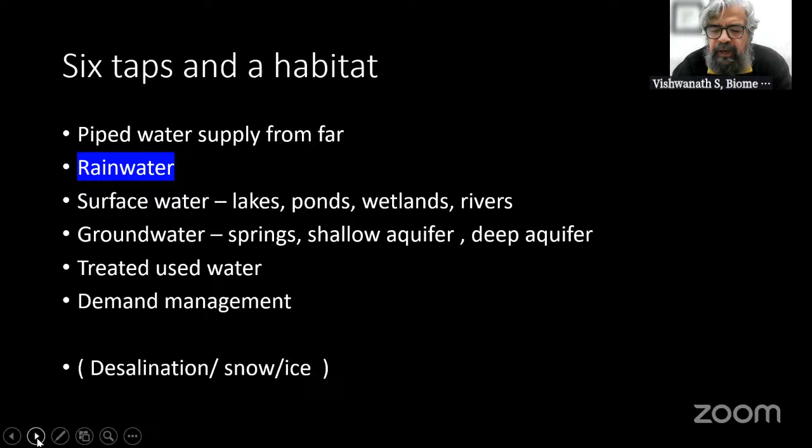So of the six taps that we have, some cities are lucky to have desalination, and some in the far north in the Himalayas may have snow and ice as one of the other taps. But broadly, these are the six taps available, and I'm only going to focus on the tap which is rainwater for this particular talk.

So what is rainwater harvesting? I want to go back to the basic definitions because there's always the need for clarity to understand what we are talking about. Simply put, rainwater harvesting is collection and storage of rain for future productive use. In the Indian context, rainwater harvesting has also been understood as recharge of the aquifer.

In other parts of the world, it's called managed aquifer recharge. But in India, rainwater harvesting is also understood as recharge of the aquifer itself. Fundamentally, of course, globally, like I repeat, it's collection and storage of rainwater. And so what are the components of this rainwater harvesting?

There's the catchment, which a designer has to deal with. There's the conveyance system. From the catchment, you have to convey the water. There's something called a first rain separator and a filtration system, where you filter the water for the quality that you need to store it longer. Then there's the storage itself.

You can have storages as rain barrels, as pumpkin tanks. You can have underground sump tanks. You can have overhead tanks, and there are many forms of storage. And finally, there is recharge, and there are many ways of designing recharge structures. I'll explain some of the recharge structures I have worked with.

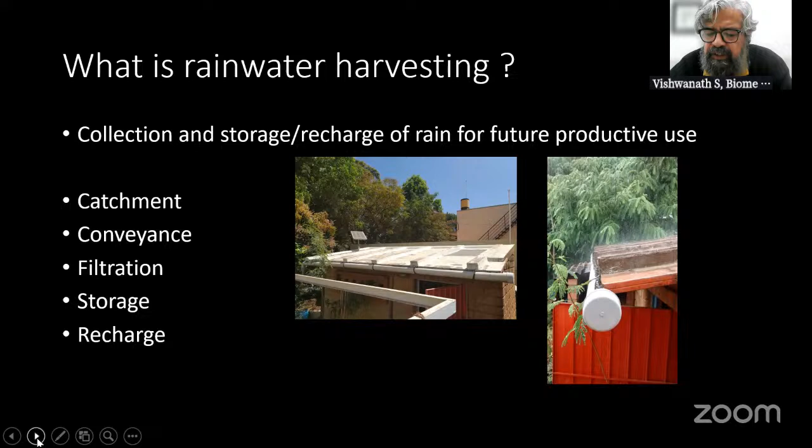So at a broad level in an Indian context, this is how a rainwater harvesting system looks. There's the rainwater coming in from the pipe, first rain separator. The blue drum is a filter in this particular case. And after the filtration, the water is stored in a sump tank. And because the underground sump tank is of limited capacity, it may sometimes overflow.

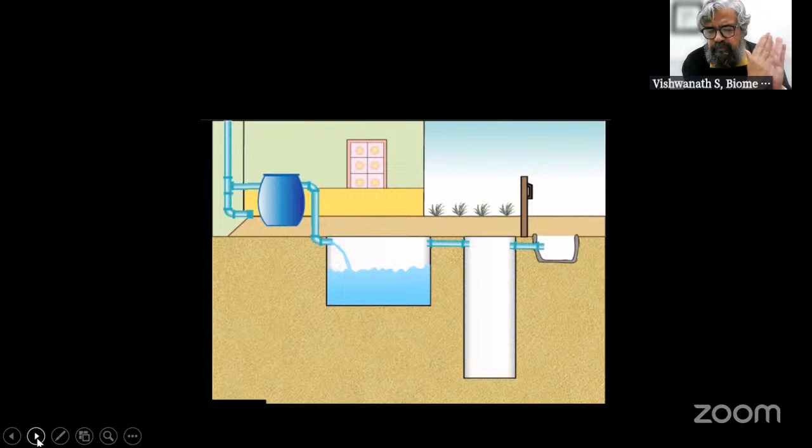And that overflow goes to what's called a recharge well. And that recharges the aquifer from which you can tap it. So all components are here. There's the first rain separator, there's filtration, storage, and recharge.

Why rainwater harvesting? Well, it's broadly at a city level to supplement water requirements. It's not a complete replacement because we don't have that kind of rainfall in many places or the capability of investing in large-scale storage. So in the majority of cases, it's a supplement to the water requirement of a household or a school or an institution or whatever is the consumer of water.

Then you harvest rainwater to recharge aquifers. Many of our cities and towns, especially in the Indian subcontinent, also Sri Lanka, also Bangladesh, also Pakistan, have a large dependence on aquifers, groundwater for requirements, and rainwater harvesting can supplement the recharge of these aquifers.

One other interesting aspect that's coming into urban areas is to minimize flooding, because flooding is now becoming an urban phenomenon thanks to climate change and global warming. But by harvesting rainwater at individual plot level, you can sort of minimize the impact of this runoff on the city pavements.

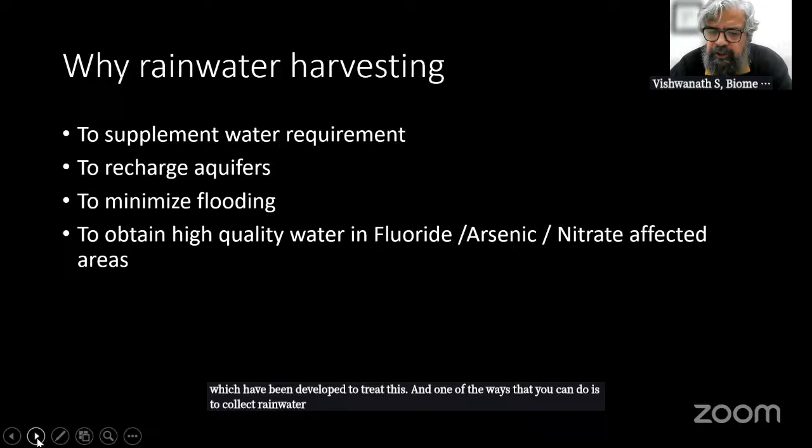And in particularly bad quality areas, like areas which are affected with fluoride, arsenic, and nitrates, stored rainwater can be free from fluoride, arsenic, and nitrate, and after basic treatment can be consumed for drinking purposes. Mr. Watson Chandrasekhar, who's also part of this conference, has many filters which have been developed to treat this. And one of the ways is to collect rainwater and filter it, make sure that it's potable, and use it to replace fluoride contaminated, arsenic contaminated, and nitrate contaminated waters.

So what does rainwater harvesting depend on? Well, obviously it depends on the total annual rainfall, but not only the total annual rainfall, but the rainfall pattern. In my city of Bangalore, rainfall is distributed over 8 months. We have 60 rainy days, but it's well distributed over 8 months. If you have a well-distributed rainfall pattern, then it becomes easier to store water. You don't have to build large storage tanks.

But suppose you're in Rajasthan or Gujarat, or states which are dry, where rainfall may occur over a single day in a year, or maybe 3 to 5 days in a year, then obviously you need to build a large storage tank, because you have to store this water for productive use.

One other interesting factor is rainfall intensity. As rainfall intensity is increasing, we need to design our conveyance system, the rainwater gutters and the downpipes, to combat this rainfall intensity, but also our filters. Our filters need to handle large volumes of rainfall. So rainwater harvesting depends on rainfall pattern, rainfall intensity, and rainfall distribution.

The catchment area is most crucial to rainwater harvesting. The catchment area needs to be clean, and both the quantity and the quality of runoff have to be assured, so that the harvested rainwater is fit for the use we desire from it. Then the biggest challenge with rainwater harvesting, as most rainwater harvesters will know, is the storage system. The storage is the costliest part.

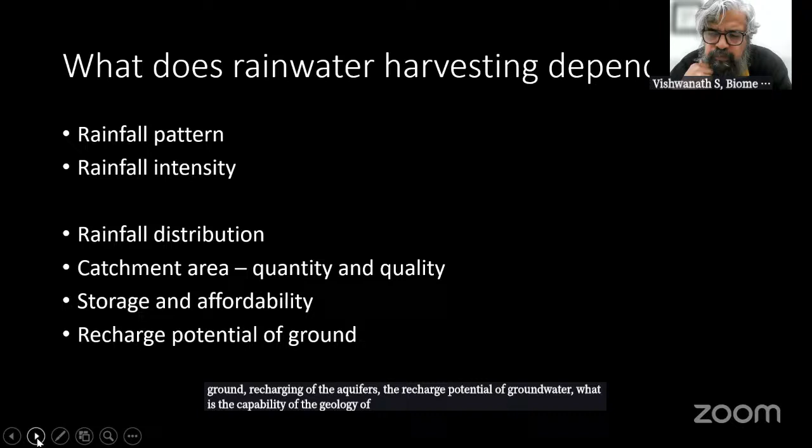There are efforts made to reduce the storage cost by building ferrocement tanks and many other forms of storage, but the cost of storage determines how much we can afford to harvest rainwater. And when it comes to recharging of the ground, recharging of the aquifers, the recharge potential of groundwater, the capability of the geology of the soil to take and absorb water and hold on to it will determine how rainwater harvesting can be done.

In my city, for us, it's of great interest that if you have a small plot of land, in a semi-arid context where there's 970 millimeters of rainfall, and if you have not built on this small plot of land, then when there's an average annual rainfall, the surface runoff is usually 15%. About 10% recharges, that is, it goes into the ground below 1 meter, but up to 75% of it stays in the soil profile of 1 meter and goes into the air through evaporation or evapotranspiration.

But the moment that small plot of land is built upon, the surface runoff now increases to 90%. The recharge reduces to 5% because we almost paved the entire area, and evapotranspiration drops from 75 to 5%. So the aim of rainwater harvesting is biomimicry. Can we design our system to hold on to the water, which is now in excess of the normal runoff from that plot of land, right?

So therefore, you leave a certain portion of it to get to the watershed to become a common asset. But 15 to 90, it's the responsibility of the institution or the building to make sure that 75% of the rainfall is either stored or recharged into the aquifer, so that it does not cause negative damage to the environment. That's one of the ideas.

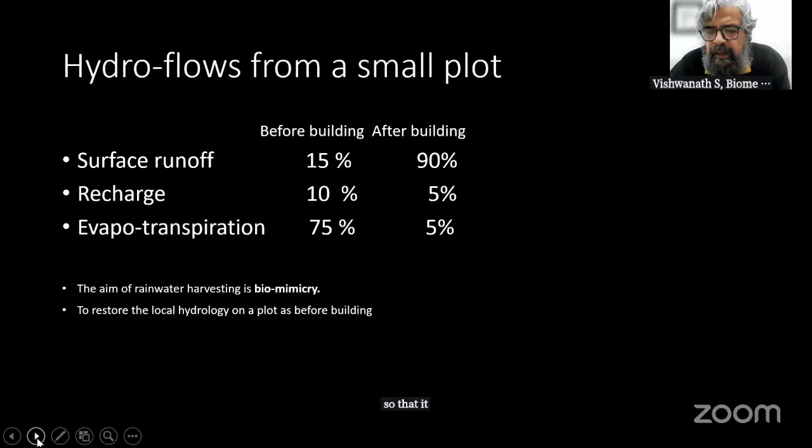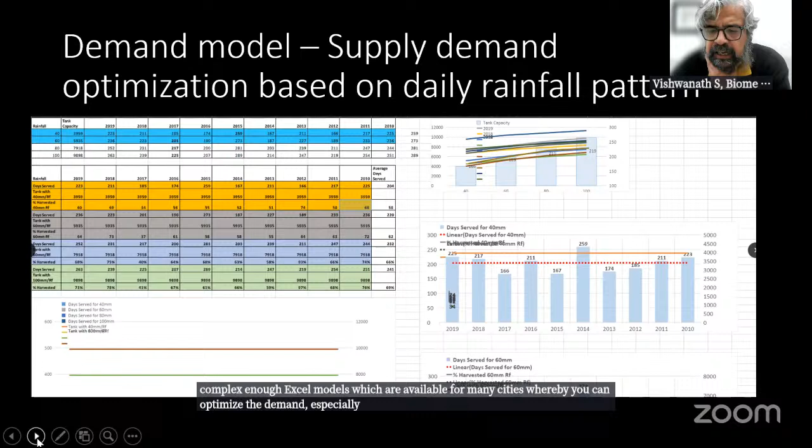And so the ideal models of designing rainwater harvesting systems would include a daily rainfall pattern for at least about 10 years, and a daily demand consumption pattern. And you draw a balance between the daily supply, which comes from the rainfall as well as the catchment area, and the daily demand. And then you arrive at an optimal storage system. There are complex enough Excel models available for many cities, whereby you can optimize the demand, especially for large industrial buildings and large institutional buildings. So it's a question of supply and demand and drawing a balance between them.

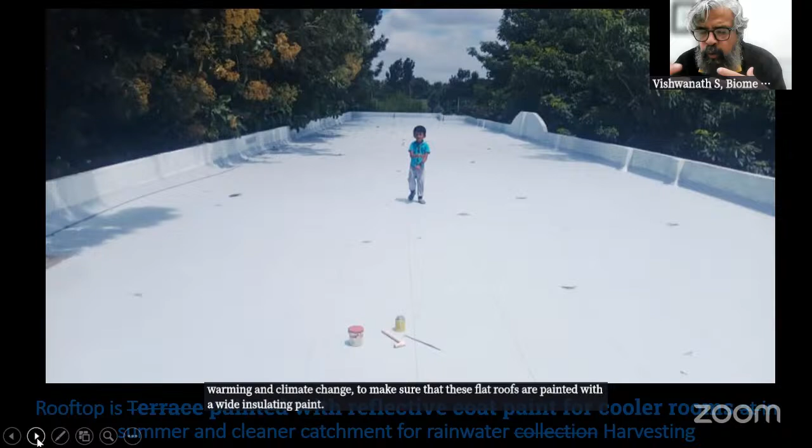Now, how do we go about designing it? Ideally, every roof should be a catchment, if you're able to design a roof to be clean enough, like this roof, as you can see, so that the surface runoff is high and the quality of runoff is also good. What you can do, as we do in these kind of schools, in this era of global warming and climate change, is to make sure that these flat roofs are painted with a white insulating paint. Two advantages. One, the rooms stay cooler by as much as 5 to 7 degrees in many cases, but also the runoff is much, much better. It goes up to 98%, and the roof can be clean.

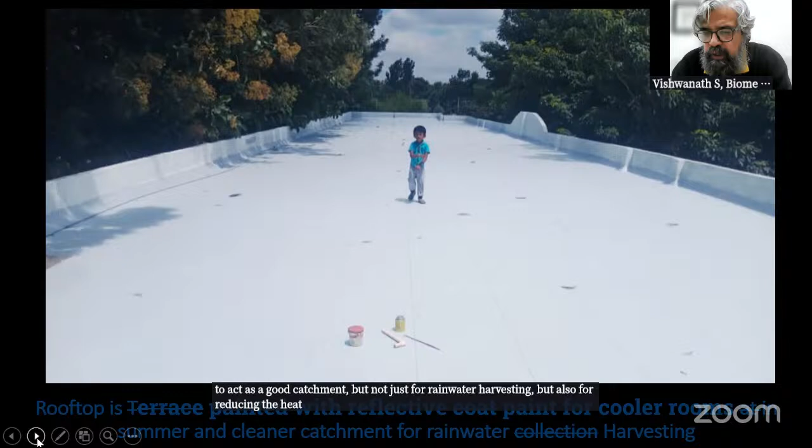So you design a roof to act as a good catchment, not just for rainwater harvesting, but also for reducing the heat inside the home, if you're in a hot, arid climate, or even in a city where the temperatures can go up due to urban heat island. The next step is to harvest rainwater. And so one of the best ways is to begin simply by putting a rain barrel. A rain barrel is just a plastic drum, like you can see, which picks up the rooftop rainwater and stores it. And then you can later use it depending on the quality of the water collected and the quality of demand that is required.

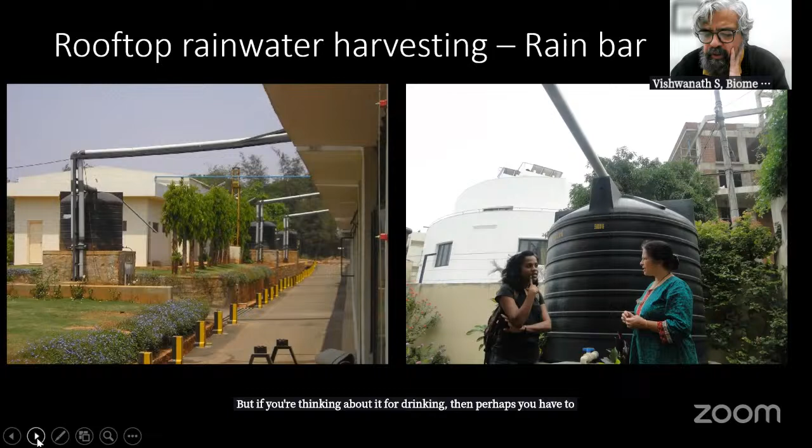So for example, for gardening, you don't really have to worry about the quality of runoff. But if you're thinking about it for drinking, then perhaps you have to be sure that the quality of the water is good for that particular purpose. Rain barrels are easy to install, and one would recommend for the new beginner to start with a small drum. You're not going to catch all the rainwater that falls on the rooftop, but you're going to catch a substantial sum, and you'll start to get an idea of both the quantity and quality of rain that is occurring at your place or locality. So we design these rain barrels to be on the terrace itself.

The room that you see on the right is actually the staircase room, which is above. So you collect it at the terrace level on the top of the roof. Then you can run a pipe to your kitchen and you can take the water directly by gravity. So you can actually get the rainwater to come to your kitchen. You can then filter it in a basic candle filter and use it for drinking and cooking, for example. And this is energy-free water because the clouds have got the potential energy and put the water at the rooftop. So you can collect it and drink it.

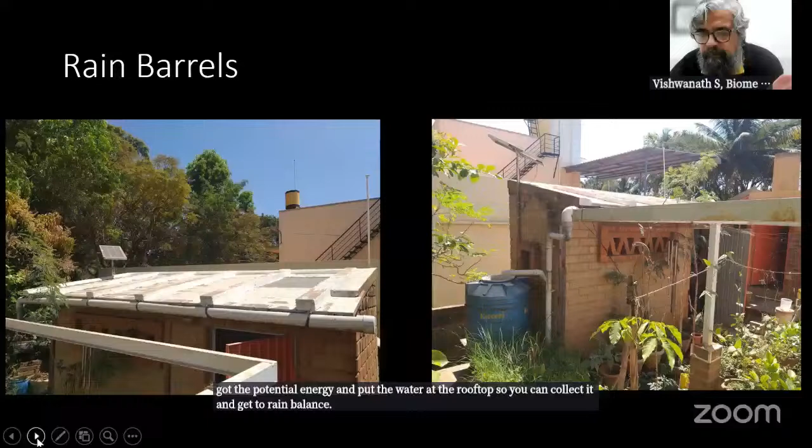So rain barrels are now, we design them, we call it lifeline water, and we put it in these kind of terraces itself for the collection of the system. Now, the rain barrel quality which we have observed is because if you just keep the catchment of the roof clean, you can see the water in the bucket being collected. It's absolutely great water, high quality water. You can check for pH, and you can see a small bottle here. It's called the H2S vial test, where you check for bacteria. So if you do regular robust checking, you can determine the quality of the rainwater. And what we found is with simple clean catchments, the quality of water improves dramatically. And so this is what is happening here.

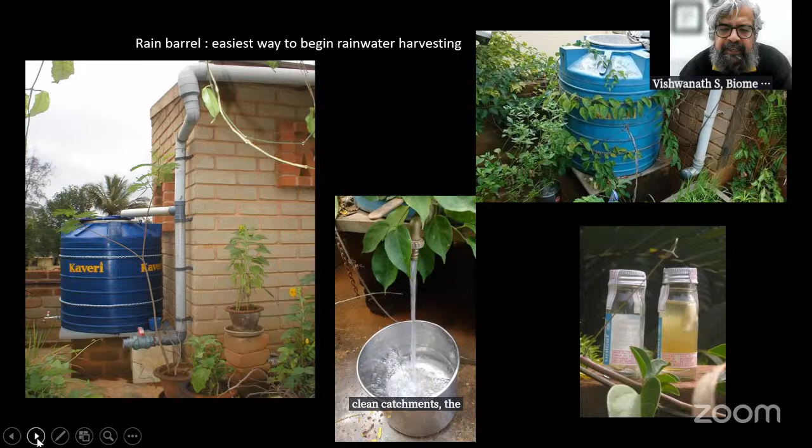You can put rain barrels at different places on a building, right? Depending on the rooftop, the slope and the incline of the roof, and the place that you have for it. It need not be large. It can be small 200-liter tanks, or it can be 500 to 1,000-liter tanks. In the Bangalore context of rainfall, even a 500-liter rain barrel, which is kept on the rooftop, can give you adequate water for drinking and cooking throughout the year. Right? Because the distribution of the rainfall is enough. It keeps topping up this 500-liter barrel, and you draw about 4 to 6 liters of water for drinking and cooking purpose, and that will be good enough to last you the whole year. So that's one good way of designing systems.

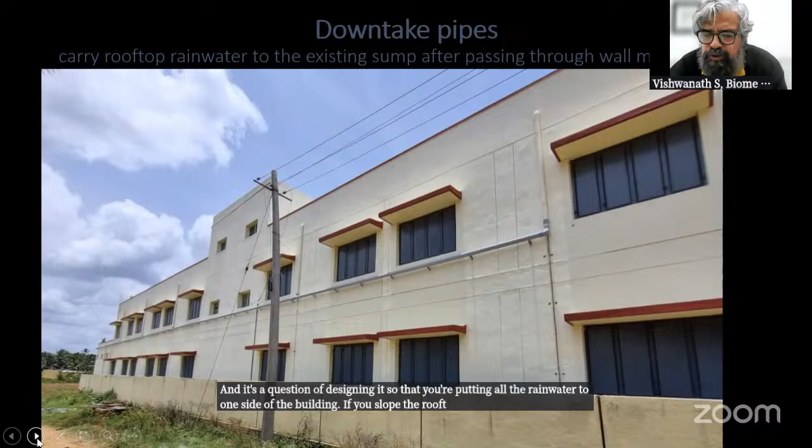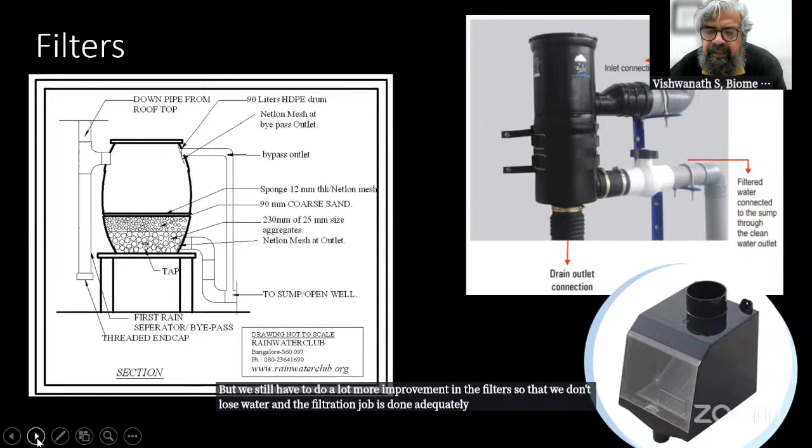Now, filters are of many types. It's a do-it-yourself filter, which you see on the left, which is basically a sand, charcoal, and gravel filter, which you can just assemble at your own home. Or otherwise, in the Indian context, there are more than 40 different kinds of filters that are available of varying capacities and intensities of rainfall and various qualities of filtration. And they're getting better and better. But we still have to do a lot more improvement in the filters so that we don't lose water and the filtration job is done adequately. But luckily, a market is being created for rainwater filters. You can order it on Amazon.

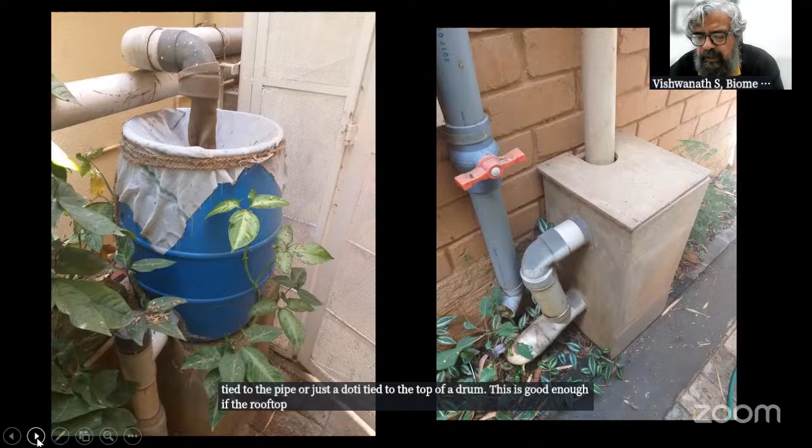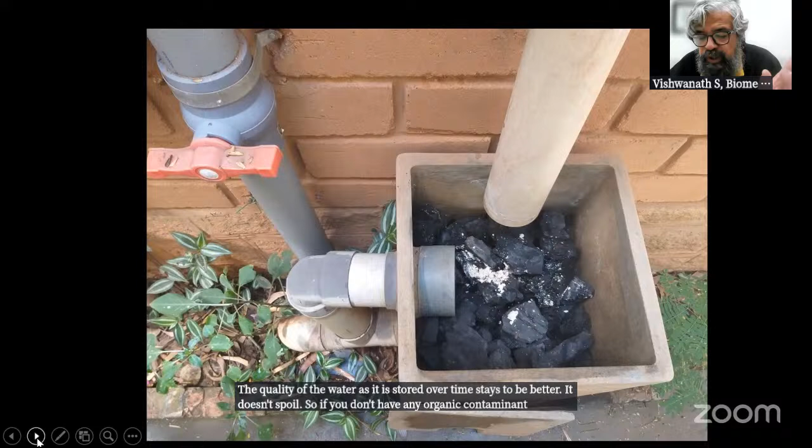That's how a do-it-yourself filter looks like on the left. It can be just a sock tied to the pipe, or just a dhoti tied to the top of a drum. And this is good enough if the rooftop is clean, or as on the right side, you have something called a charcoal filter. And that's how a charcoal filter looks like. You have series of charcoal, crushed charcoal, and gravel and sand to filter the water and push it to wherever you're storing it. So filtration is something which is crucial and essential, because if you remove the organic component like leaves and leaf litter, then the quality of the water as it is stored over time stays better. It doesn't spoil. So if you don't have any organic contaminant, rainwater can be stored for years together, right? So that's the advantage you have. And so here you see in a school building, the first rain separator and a masonry filter. And on the right, you see ready-made filters, which have been put up.

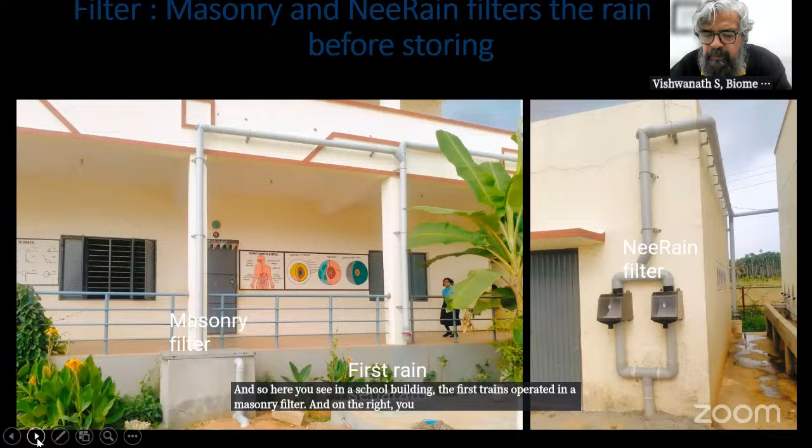So recharge is now a common system in our city of Bangalore. I think we have more than 300,000 recharge wells. So here, Mr. Balasubramaniam is showing you rooftop rainwater comes in, there's a blue drum, and the blue tarpaulin covers an old well, a 40-feet old well, which he recharges with his rooftop rainwater. He's putting in about 200,000 to 240,000 liters of rainwater annually, and the well gives him all the water that he needs for the whole year. So you can have almost city-level water independence if you do good recharge and if the aquifer conditions are good for you.

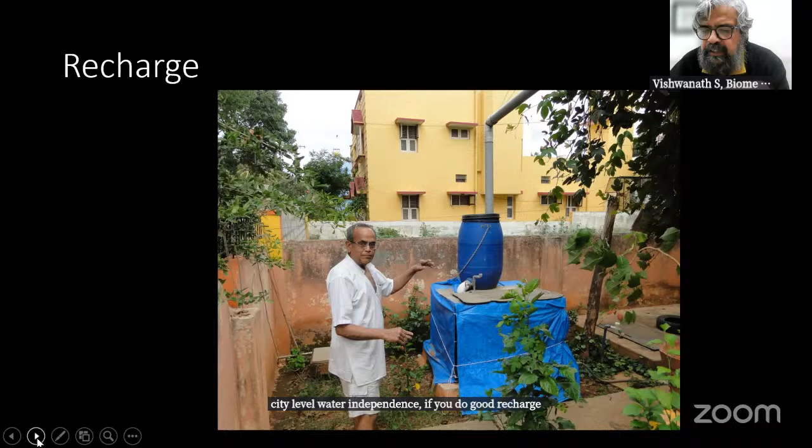So what we have done in our city of Bangalore is we have made it mandatory for every building to do rainwater harvesting. And the mandate is that for every square meter of roof area, you have to do a 60-liter storage or recharge. And for every square meter of paved area around the building, you have to do 30 liters of storage or recharge. But if you don't do any paving or roofing, then that is allowed free for you because you're allowing the water to percolate into the soil.

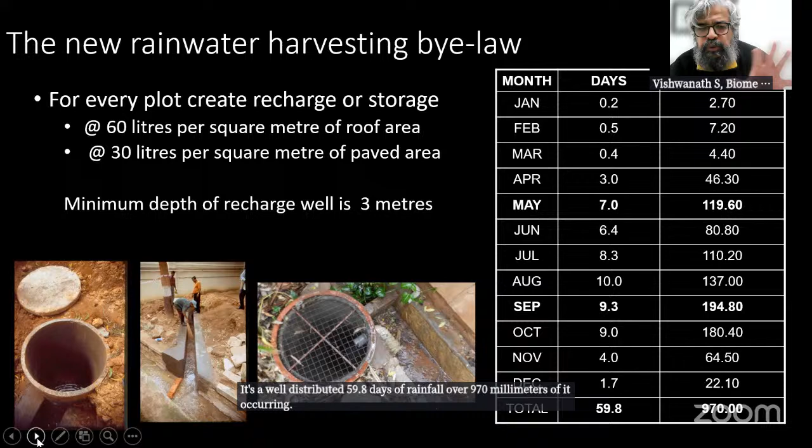And the other condition is that the minimum depth of the recharge well should be 3 meters. The idea is that you should percolate through the hard rock and clay surface at the top and allow the water to infiltrate into the ground. This bylaw is based on the rainfall pattern that you see on the right. It's a well-distributed 59.8 days of rainfall with 970 millimeters of it occurring. And based on that, you arrive at a bylaw. So every city can arrive at its own bylaw.

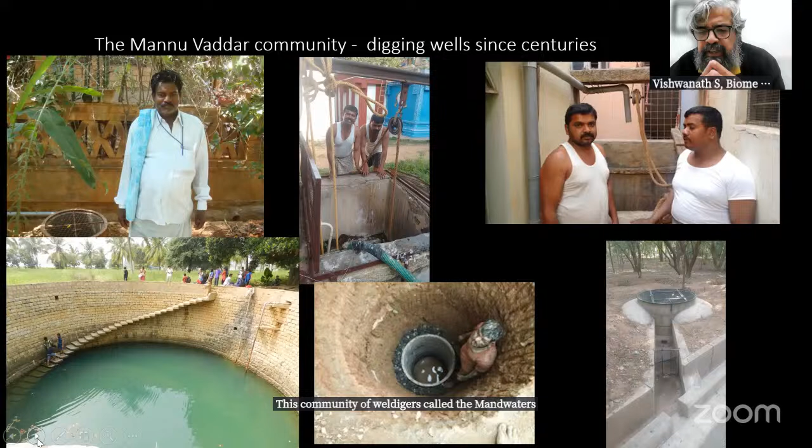How do you dig recharge wells? Here are well diggers holding soil which they've excavated from a well. Beautiful soil profile colors that you can see. This community of well diggers called the Mannu Vaddars have been digging wells in our city for more than 1,000 years. It's a profession for them. They understand soil, they understand how to dig, they understand where to dig for water. So we're ensuring that they get a livelihood through this process, and we use their knowledge and skills to dig recharge wells. As you can see, the middle right figure is doing a recharge well. All these wells are being cleaned up or desilted by this well digging community.

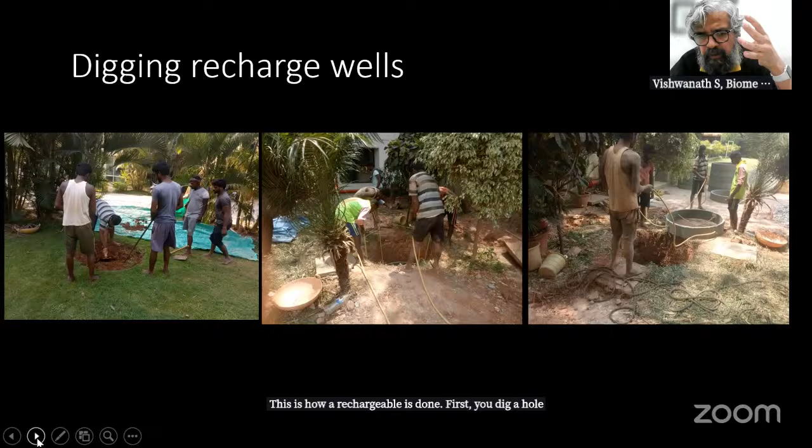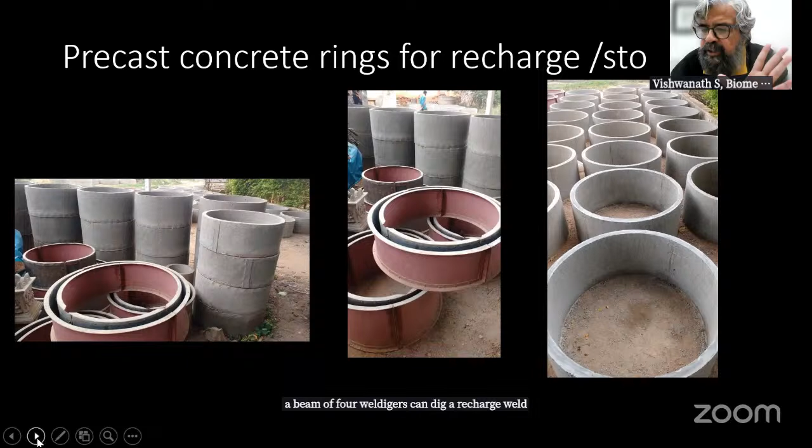This is how a recharge well is dug. First, you dig a hole about 4 feet in diameter, about 20 to 30 feet deep. As in the center, you excavate all the earth out. Then you use precast concrete rings to slip them into the hole and then cover it with a grill on top as a safety measure. A team of 4 well diggers can dig a recharge well in 2 days, right? A 30 feet deep recharge well, 4 feet in diameter in 2 days. And then you cover it with a grill, as you can see on the right.

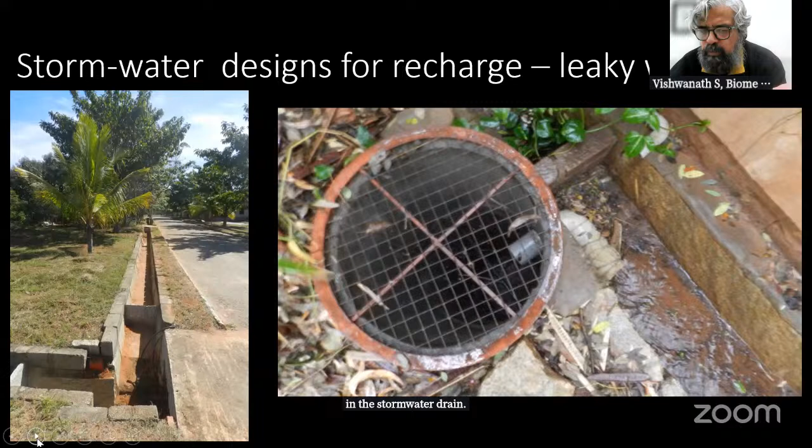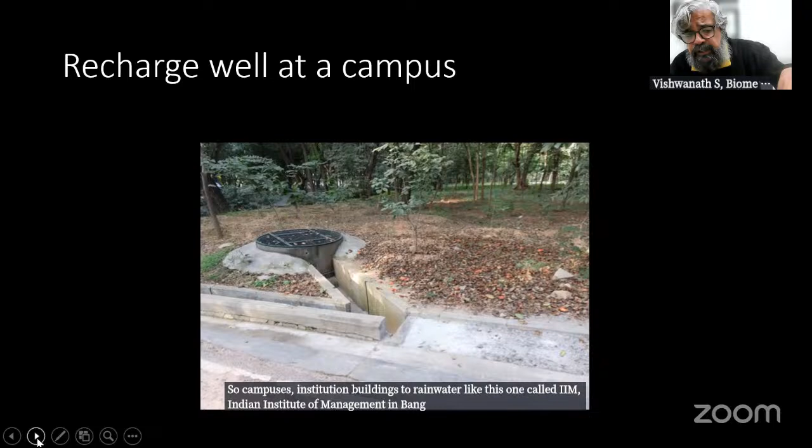And you can then link clean stormwater drain or rooftop rainwater to this recharge well to push all the rainwater into the aquifer. That's a design idea that we have for storm drains, especially from clean roads. There should be no sewage or solid waste in the stormwater drain which you're recharging. Only rainwater should be there, and that will then recharge the aquifer. So campuses, institution buildings do rainwater harvesting, like this one called IIM, Indian Institute of Management in Bangalore, where the clean road runoff is picked up and pushed into recharge wells, over 60 of them, and that's benefited the campus tremendously.

What do you do at a gated community level?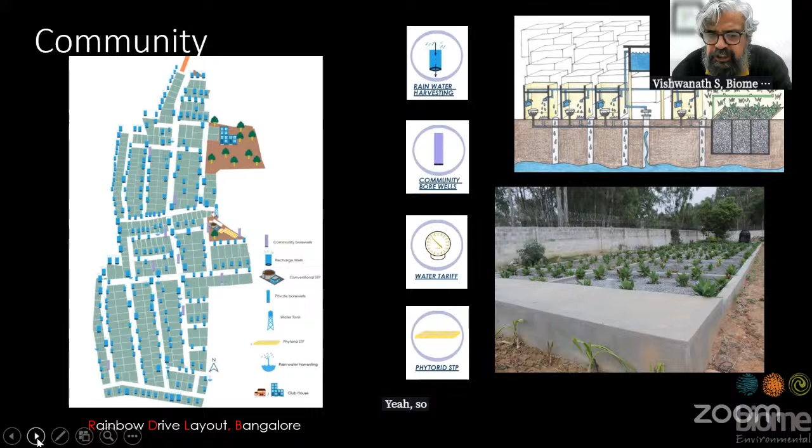This is a gated community of about 34 acres and about 360 plots. Since they're not connected to the city network, every one of them would have drilled a bore well. What the community did was come together and say, we'll drill 3 common bore wells, but each one of us will recharge. So every one of them has made a recharge well. We have 360 recharge wells but only 3 bore wells to extract. They've connected the network, put meters on it, and priced the water so you draw only a reasonable amount from the aquifer, and they have become net positive.

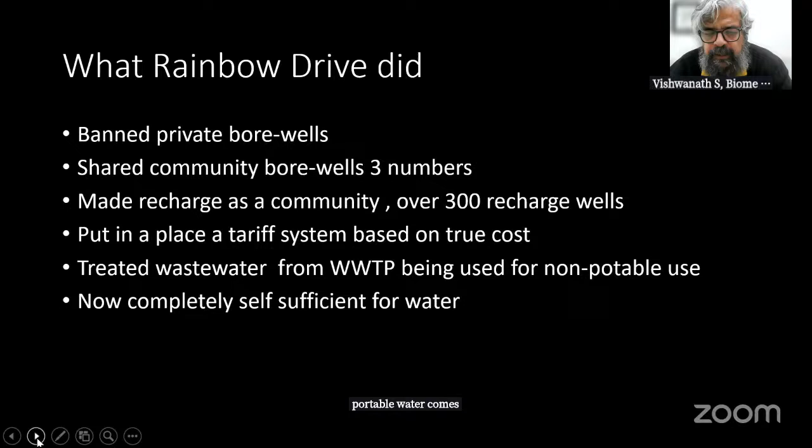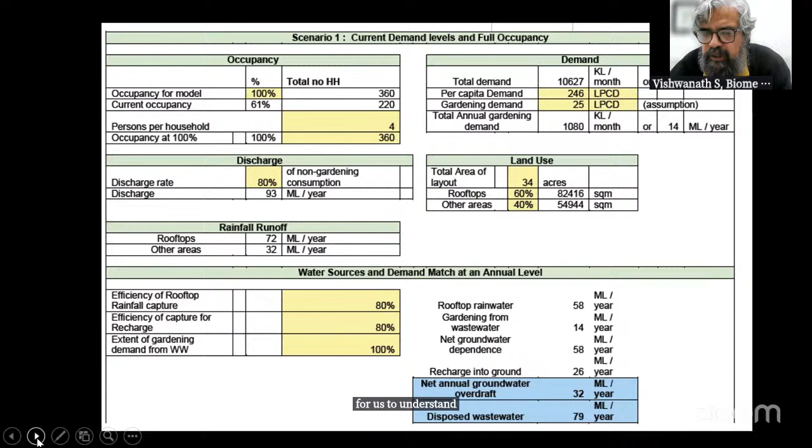In addition, they have put in a wastewater treatment plant and made sure treated wastewater is supplied to every household free of cost, reducing the demand on water. Non-potable water requirement of the household comes from treated wastewater, potable water comes from the groundwater. Detailed calculations are arrived at to draw water balance at a gated community level. It can be done at a city level also, so we can understand how to manage rainwater better and put treated wastewater to productive use.

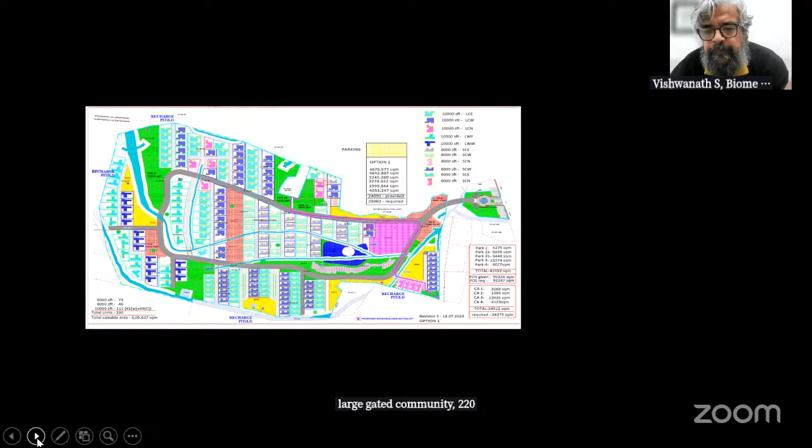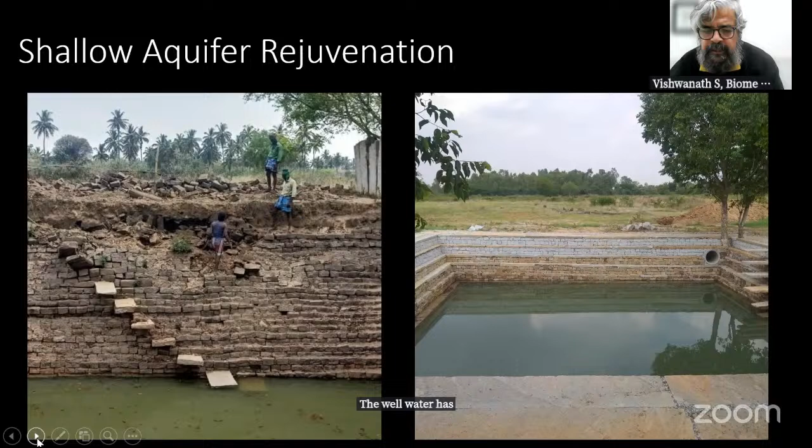One other gated community, 220 acres, large gated community. What they did here was identify recharge zones for the rainwater and discharge zones where wells are dug. They cleaned up the well. The one you see on the left is a dilapidated old well, but with enough recharge of rainwater at the top surface, the well water has come back to life, as you can see on the right. So we are protecting the heritage, but also the functionality.

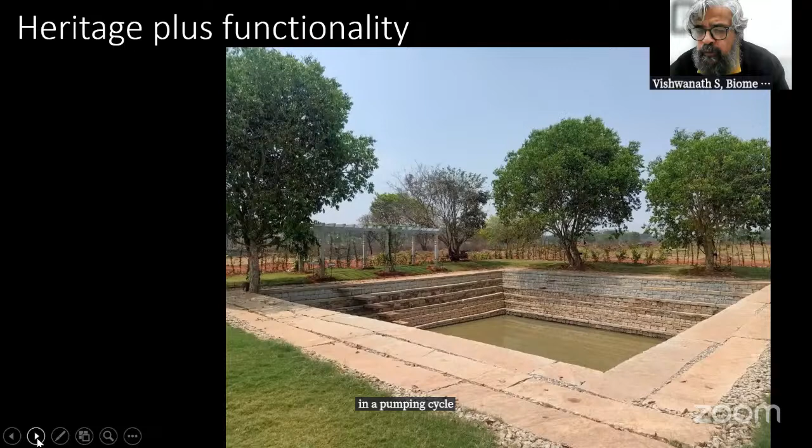This dug well, this open well, gives about 1.1 million liters of water in a pumping cycle of 36 hours. It's more than enough to meet the requirement of the entire gated community. So if you do a good job of protecting heritage, doing good recharge, and understanding aquifers, you can meet all your water demand through it.

So therefore, bylaws are being introduced, as I showed earlier, and it's now mandatory to do rainwater harvesting, wastewater recycling, groundwater management, metering in every house, and automatic switch-off pumps. These are mandatory in our city.

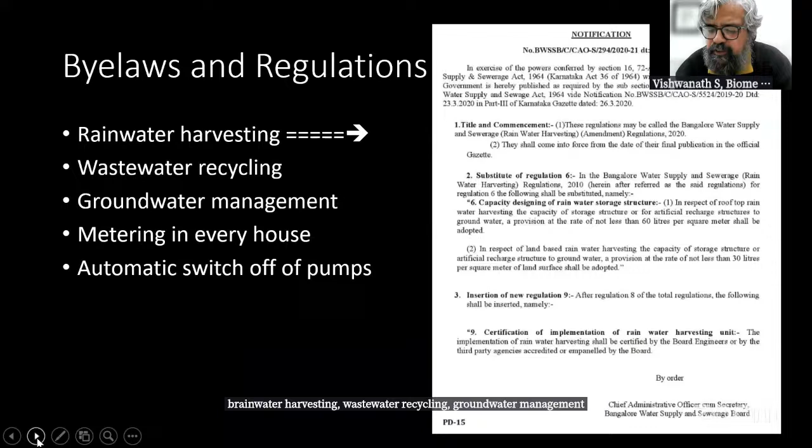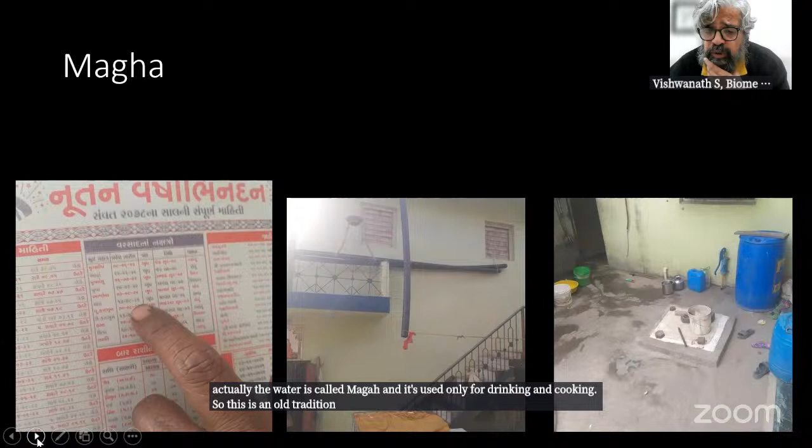In a particular case in Gujarat, what the people do is collect rainwater in the month called Magha, and actually the water is called Magha, and it's used only for drinking and cooking. This is an old tradition which is more than 2,000 years old. So these kind of heritage systems are also at play right now.

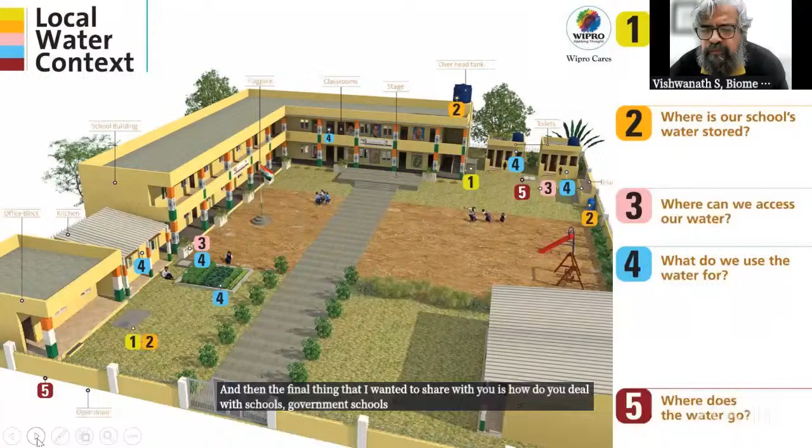The final thing I wanted to share is how do you deal with government schools? One of the great joys of working on water systems is to work with school children and school teachers. In the school, the system you design is the same: filtration, storage, and recharge, as I was showing you.

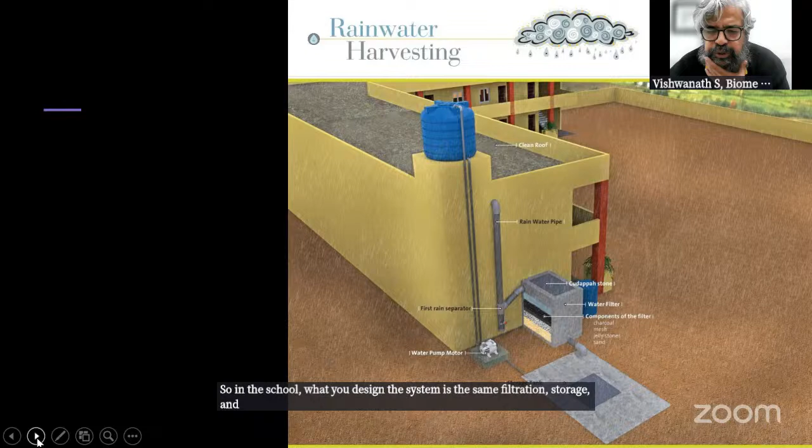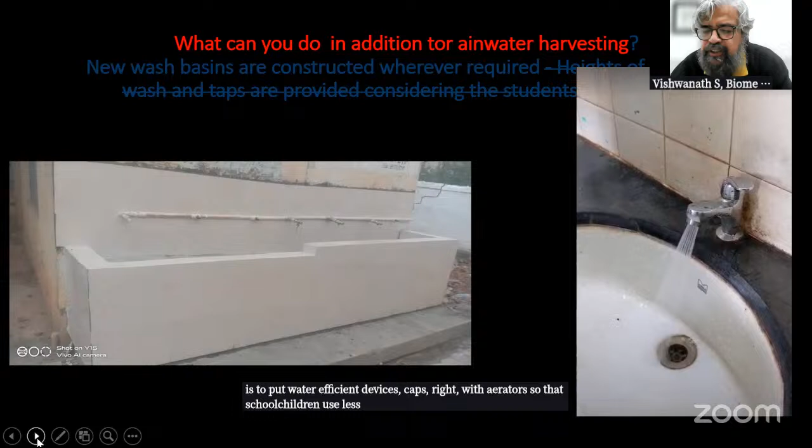In addition to rainwater harvesting, you can put in water efficient devices, taps with aerators, so that school children use less water in washing their hands or washing utensils. At home, what else can you do with rainwater harvesting?

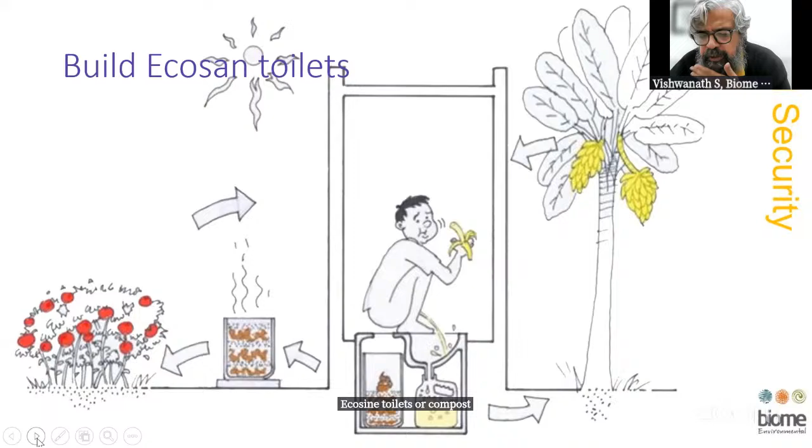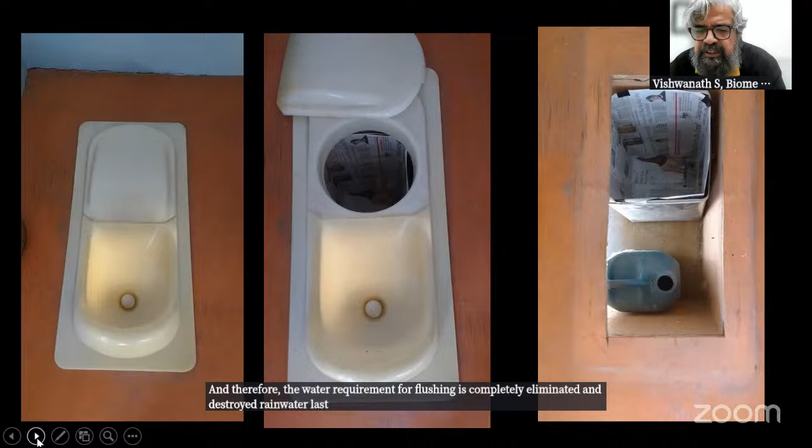You can build Ecosan toilets. Ecosan toilets, or composting toilets, are source-separating toilets which separate urine and feces in a pan. The water requirement for flushing is completely eliminated, and the stored rainwater lasts you longer, because the largest demand at a household, city, or village level is usually for toilet flushing. So if you're able to eliminate that with composting toilets, your harvested rainwater lasts longer.

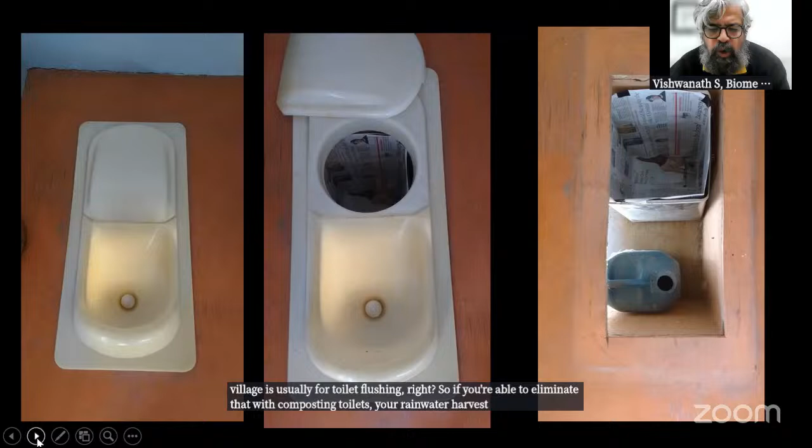You can also do grey water recycling using filters and eco-friendly soaps and detergents. Again, the rainwater is good soft water. If you wash your clothes, use shampoo, and then treat the grey water and use it for non-potable use, it reduces your freshwater demand.

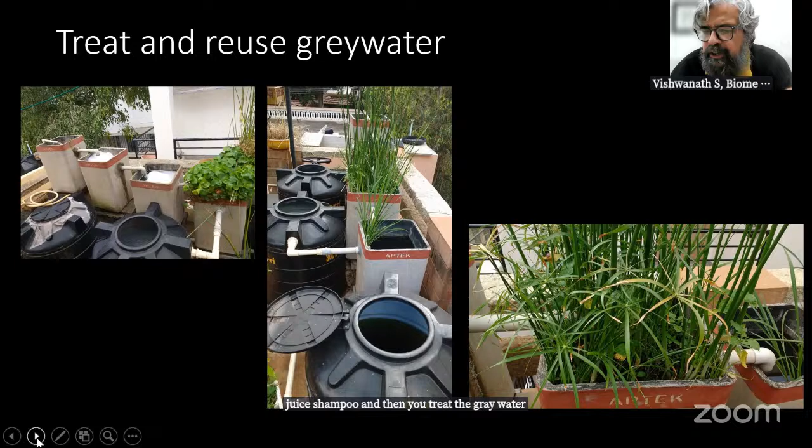So with Ecosan toilets and grey water harvesting, you can even grow paddy on the rooftop with the grey water you have. You can have a kitchen garden, a rooftop garden, which keeps your house cool but also gives you the vegetables you need. You can actually grow rice on the roof, using the Ecosan toilet output as fertilizer and grey water as the source of water.

You can work with school children, explaining quantity of rainfall, quality of rainfall, and quality of water in general. Children are very curious. If you work out a physical demonstration of what rainwater harvesting and aquifers are, they are very eager to learn. They soak up the knowledge like sponges, and they're great ambassadors for the future. So what we do is give them a water quality testing kit and a rain gauge, so they measure rain every day and calculate how much is being harvested on the school rooftop. With the water quality testing kit, they check the quality of the rooftop rainwater, but also other waters they consume, and they become completely water literate.

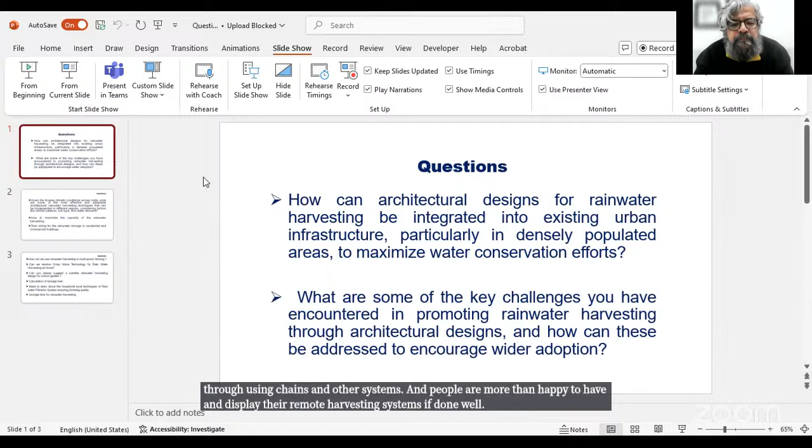Very nice answer. Given the diverse climatic conditions across India, what are some of the most effective and adaptable architectural rainwater harvesting techniques that can be implemented?

Correct. So as one said, rainwater harvesting depends on the total volume of rainfall and the pattern and distribution of rainfall. Like in Sri Lanka, where there is a dry zone and a wet zone, in India too you have dry zones and wet zones.

But rainwater harvesting has been practiced by those people who've been in the most arid of conditions. So it's Rajasthan and Gujarat which have done excellent rainwater harvesting. But with the arrival of the modern piped water supply system, we have lost touch with rainwater harvesting.

So one of the good things to do is to understand what traditional practices of rainwater harvesting were, modernize it, put it in context, and work on it. But in other areas, we have to do rainwater harvesting as a completely new idea.

For example, Chennai has done a very good job of aquifer recharge with rainwater harvesting, or Bangalore, which does a combination of storage and recharge, or Hyderabad, where in some areas you may not be able to do rainwater harvesting for recharge because it's very rocky.

So you may have to store the water. Depending on the context, the local affordability, rainfall patterns, and aquifer conditions, we have to take a wise call to do rainwater harvesting appropriately.

So ultimately, we must also use traditional wisdom, isn't it? That is always a path for us. Yes, it has to be traditional wisdom in the modern context.

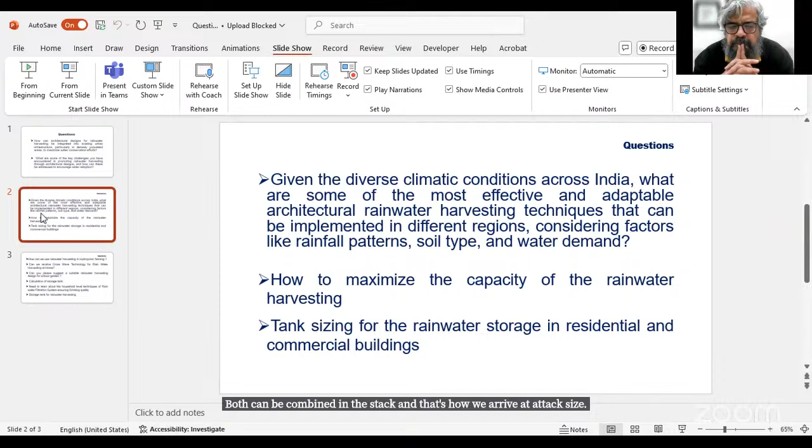Quickly, because the time is also short. Somebody asked about hydroponic farming with rainwater harvesting water. Absolutely, yeah, that's an excellent suggestion, because rainwater is so soft and so pure.

For hydroponic farming, you need to add fertilizers to the water - nutrients like nitrogen, phosphate, potassium, and 13 different micronutrients. Rainwater is able to absolutely absorb all these fertilizers, becoming a great fertigation medium for hydroponic farming. Even in polyhouses, where you do glass houses or intensive farming inside, rainwater if harvested, stored, and pushed through a drip irrigation system is a great fertigator. You can add fertilizers and put it through drip irrigation systems in polyhouses, and for hydroponic farming it's absolutely wonderful.

Can we use Cross Wave Technology in rainwater harvesting at home? That's something I need to work on, because I'm not 100% sure. I tried to understand what Cross Wave Technology is, but I don't have an answer for it right now. I need to look it up and be able to give it.

The next question, you have already given the answer, about school rainwater harvesting. Right, sir, but I'll reinforce the message again. Yes, if we are able to convince our younger generation, the boys and girls in 6th, 7th, and 8th standard, how scarce water is, how our ancestors managed with water, how we can manage water, and understand the quality and quantity issues with water in our current context, through actual physical demonstration of rainwater harvesting and school gardens, they learn the benefits of good organic food and good quality water for health and sanitation. If you have good water and good food, 90% of your diseases are already handled, right? Yes, and schools are the best place to do this kind of demonstration.

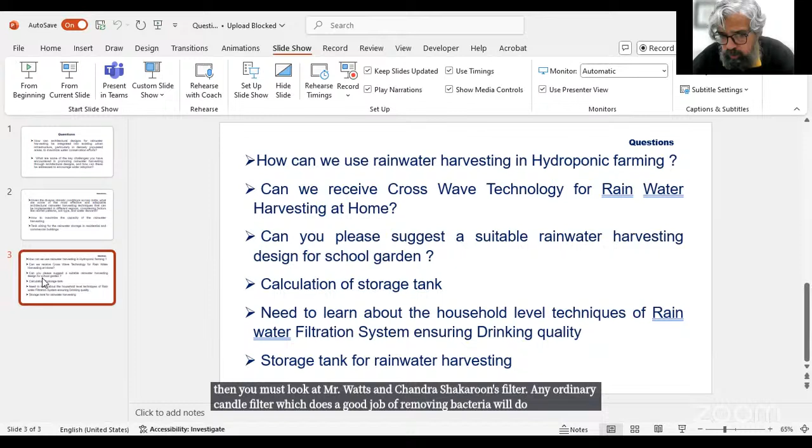Post storage, there's a filtration system, and that depends on what you want to use it for. If you want to use it for drinking, you must look at Mr. Watson Chandrasekharan's filter. Any ordinary candle filter which does a good job of removing bacteria will do fairly well if you want to use it for drinking. If you want to be doubly sure, you can use UV systems. You don't need RO systems - just UV filtration is good enough, even for drinking water quality.

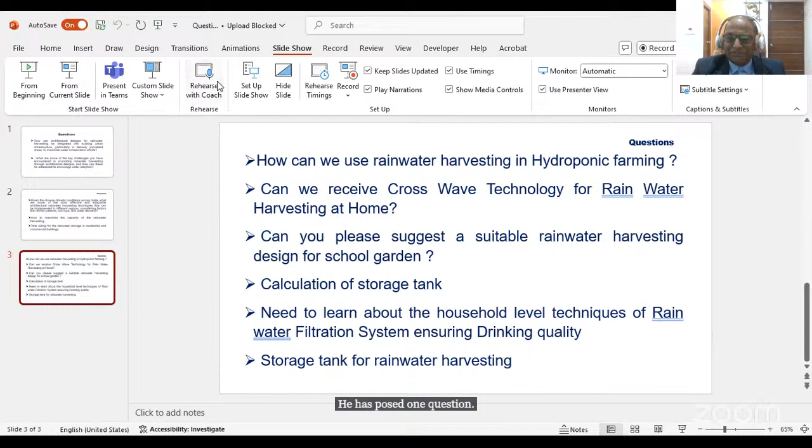Excellent, sir, and we have completed this one. A few questions - I think Mr. Chandrasekharan has posed one question about training SHGs on rainwater kits, especially talking about the kit. Can you throw some light on that, sir?

He's a crusader, and Mr. Chandrasekharan is absolutely right. We need to get water quality testing kits, which are reliable and cost effective, as much as possible into the market. It's already being said that a TWAD-approved kit by IIT Madras is coming into the market. That's very nice. We need more R&D, more cheaper alternatives, more reliable alternatives to reach most of our citizenry so that they become aware of it.

Water literacy is a combination of quantity and quality, and that understanding has to come to our farmers, our housewives, our businessmen, our citizens as a whole, right? It's a large journey of which rainwater harvesting is a small component.